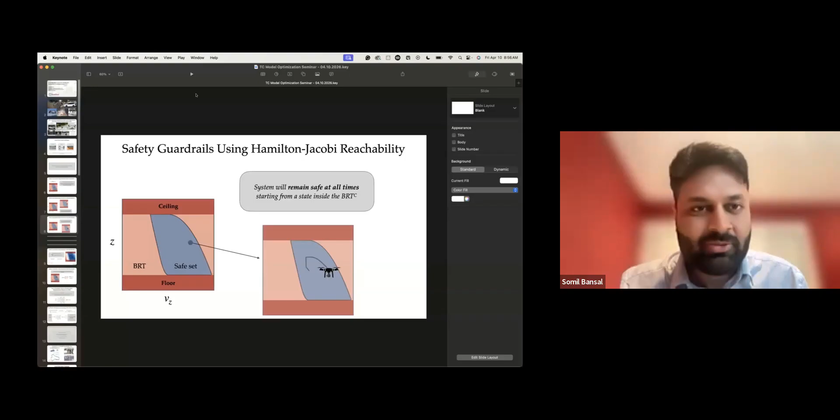Thank you so much for such a warm introduction, Friederike, and thank you for running this amazing series. It's a pleasure to be here. Let me quickly share my screen and then get started. I think I might not be able to share until, oh, well, great. I think I should be able to share now. Can you see my slides and everything? Yeah, perfect. Perfect. Well, thanks again, Friederike.

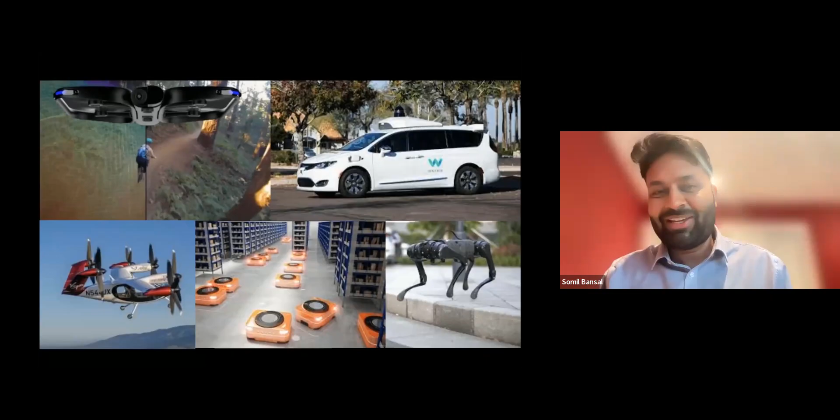And today I'm very excited to talk about some of the work our group has been doing on thinking about safety of robotic systems in open world. And I will explain what I mean by that. So let me start with saying that it is a great time to be working in robotics. Thanks to machine learning and AI, we have made significant advances across a broad range of autonomous systems. So we have started to see the tools that not just work for a single robot, but they work across a variety of different robots, ranging from autonomous cars, autonomous drones, warehouse robots, legged robots, and soon, hopefully, flying taxis.

But at the same time, as these systems are being deployed from our lab environments to complex real-world environments, which is what I'm going to call the open world in this talk, one of the critical challenges they have to face is safety. And this particularly becomes a challenge when we think about these systems deployed at scale. And a perfect example of that in my head is that of Cruise.

So for those of you who don't know, Cruise rolled out their self-driving cars in San Francisco City, I think a couple of years back now, around the time Waymo launched their cars in San Francisco. But they had a number of high-profile safety incidents where the car crashed into pedestrians. And as a result, they had to actually roll back their entire autonomous driving program from the city. So these safety incidents have real consequences when these systems are being deployed in real-world settings.

And so that's what I want to talk about. Like, what can we do about these safety issues? But before that, let's talk a little bit about what makes safety so challenging when these systems are deployed in real-world environments. Now, compared to traditional settings, there are three unique challenges that open world presents. This is by no means an exhaustive list of challenges, but these three sort of come first in my mind.

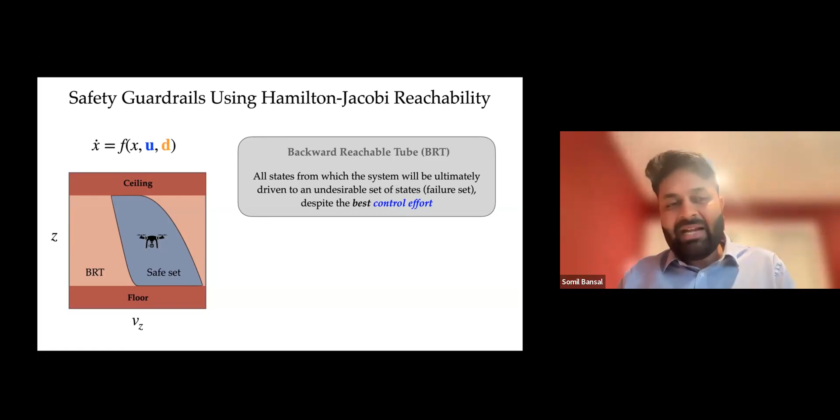To ground this with the help of an example, imagine you are designing an autonomous quadrotor that is moving longitudinally up and down in this room. And so here the ceiling and floor might represent that failure set that we don't want the quadrotor to crash into. This light red region is the backward reachable tube, meaning that if the quadrotor starts at any state inside this set, then it will eventually crash into the ceiling or the floor, no matter what policy you apply on this quadrotor.

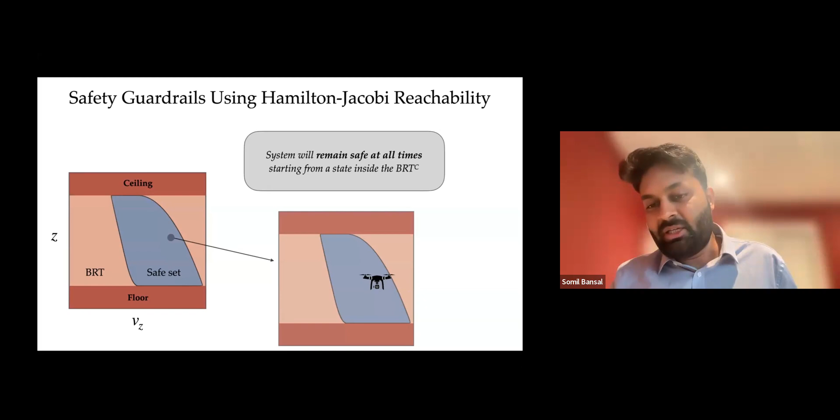What we are really interested in is the complement of this set, or the light blue region over here. And the property of this light blue region is that there exists a policy to keep the system inside this light blue region forever. And so in other words, if we can compute this light blue region, we can keep the system safe at all times.

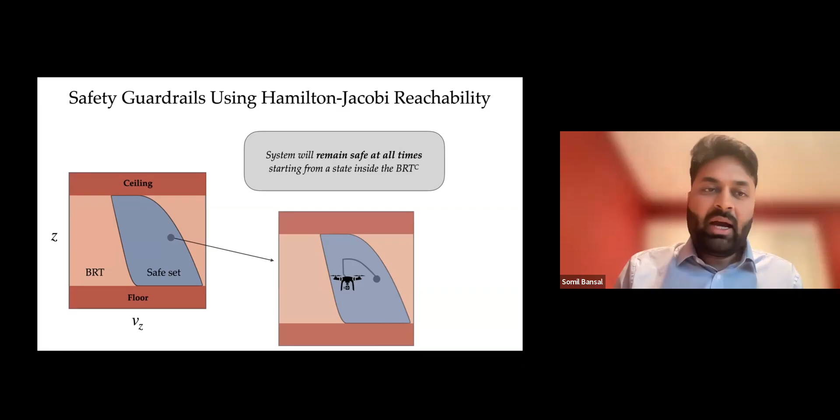Now, one way to compute this backward reachable tube and the light blue region is via solving what we call the Hamilton-Jacobi-Isaacs partial differential equation. Now, this is a scary looking partial differential equation, but ultimately what it gives us is a value function, which you can think of as a safety index function. Essentially, a more positive value function is telling you that you're more safe, and a more negative value function means you're more unsafe.

So for example, here I'm showing the value function for that quadrotor example. The more red means you're more unsafe, the more blue means you're more safe. And the boundary between safe and unsafe is decided by the value function equals 0. So positive value function, more safe; more negative, more unsafe; 0 means you're at the boundary of safety.

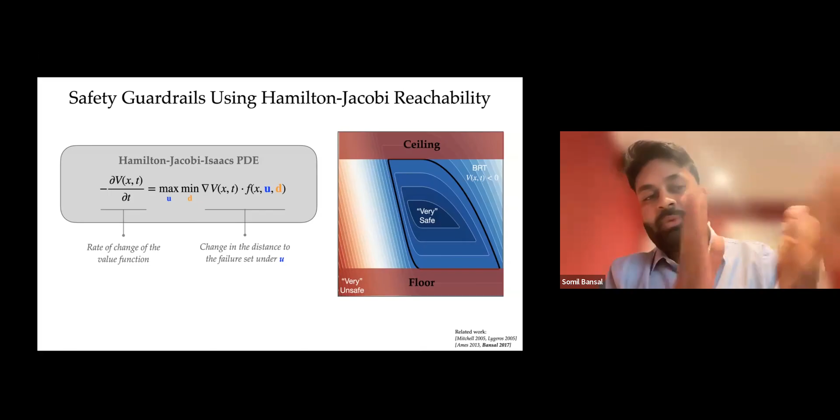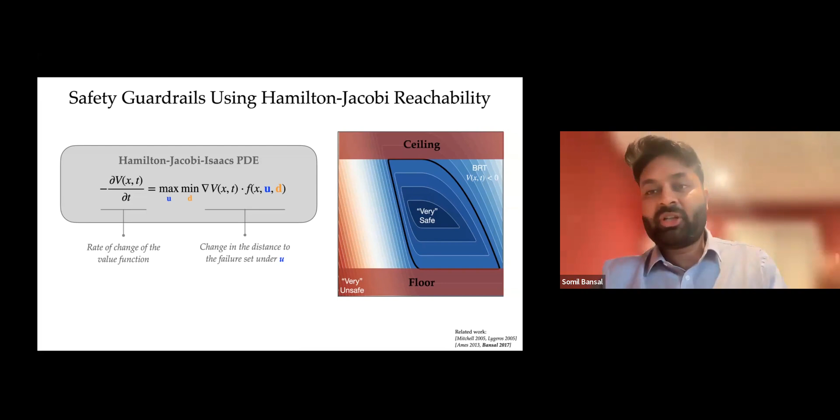Okay, so to summarize the last 4 slides, essentially, if I want to compute a safe set for the system, one way to do that is to compute this value function or the safety index function by solving this partial differential equation. Now, theoretically, this framework is really, really strong. But even if I ignore all the uncertainties that I talked about earlier, computing this value function can be computationally very, very challenging. Traditional methods to solve this partial differential equation cannot scale beyond 5 or 6 dimensional systems.

And so one of the key things that our group has been focusing on is developing neural reachability methods. So these methods are inspired by physics-informed neural networks. Physics-informed neural networks are a set of methods that have been designed to solve complex partial differential equations arising in fluid dynamics. And the basic idea behind these methods is that you can use the partial differential equation as a loss function for training the neural network to learn an approximation of the solution.

And so what I mean by that is we know that the true safety value function must satisfy this partial differential equation. So what if I use the PDE violation error as my loss function? And essentially what I do is design a very simple self-supervised learning algorithm where in each training iteration, I randomly sample some state and time. I pass it through the neural network to compute this value function. Of course, it's only an approximation. But then I look at how much PDE error there is in my solution. And this error can then be backpropagated to update the neural network parameters.

And so essentially you can imagine the neural network is incentivized to learn a more and more accurate representation of the safety value function that satisfies this partial differential equation over its training iterations. And if I'm able to reduce that error to 0, then I found a perfect solution. In practice, we find an approximation to this partial differential equation.

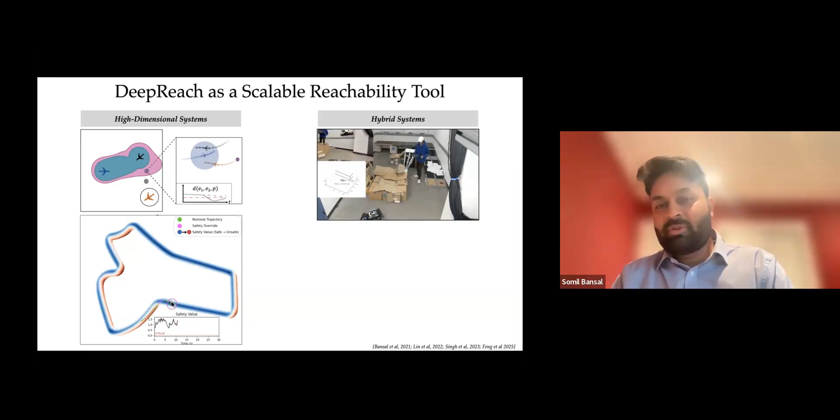the moment. We have also applied these methods to compute reachable sets for hybrid systems and contact-rich systems such as legged robots, as well as to compute reachable sets directly from simulation-only information. So when we can't write the dynamics in analytical form, but can only write a simulator. And so you can imagine this being very relevant for sim-to-real kind of training pipelines.

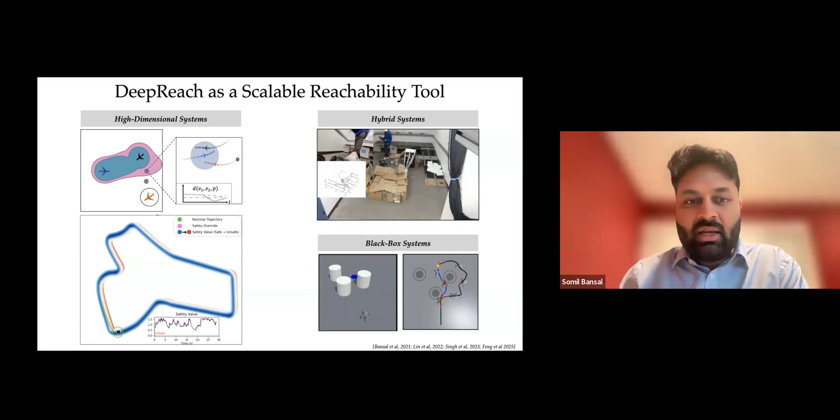Now, before I move ahead and talk about how to handle open world uncertainty, I want to make one last comment, which is the reason why I'm so interested in this value function is that this value function provides a very simple guardrail mechanism on top of any nominal policy. And this nominal policy could be an AI-based policy, could be a foundation model-based policy, where the idea is that as long as my nominal policy is keeping me inside the blue set, in other words, if the value function is positive, I can apply that nominal policy uninterrupted.

Now, at any moment, if that nominal policy is trying to get out of this blue set, meaning it tried to enter the BRT, that's the only time I apply the safety controller that comes out of Hamilton-Jacobi reachability analysis. So in this manner, we can actually put a guardrail around the nominal policy where we do minimal intervention in the nominal policy to maintain system safety.

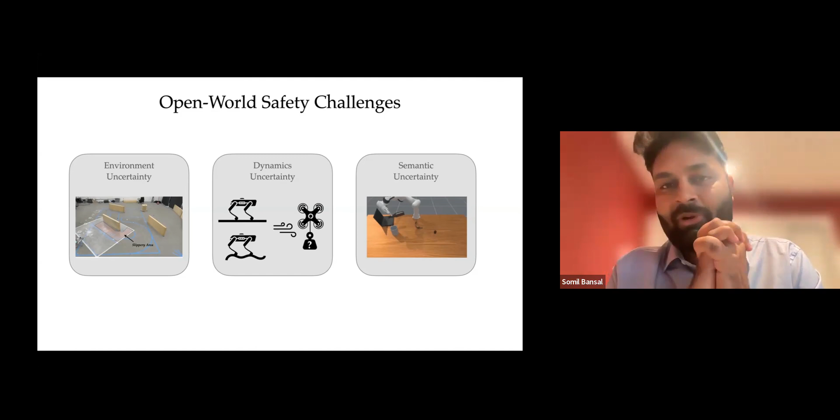Okay, so what I've talked about so far is that reachability analysis is one way to provide guardrails on systems. We now have tools to compute these reachable sets and the value functions for high dimensional systems. But so far, I'm still assuming that what is safe about the system and what is unsafe about the system is known a priori. Dynamics are known a priori. Essentially, nothing is changing online yet.

And so now I have to really tackle the open world challenges where I have environment uncertainty, dynamics uncertainty, and semantic uncertainty that's only going to be revealed to me during deployment time online. And so that's where the flexible nature of these neural reachability methods comes into the picture, where we can now input additional data, for example, the raw observations of the robot, and learn the value function as a function of these observations. So essentially, we are calling these observation-conditioned safety representations, which can be queried online to adapt safety corresponding to any online data you might receive on the robot.

And here is an example of what that means. So here this quadruped has never been in this environment before. What it has is an onboard LiDAR from which it's getting LiDAR scans, something like this. And it is using these observation-conditioned reachable sets to constantly adapt its safety value function in response to these LiDAR scans, essentially in response to the obstacles it's going to encounter in the real world. And then it's using that as a safety guardrail on top of an RL-based policy. It's a machine learning-based RL policy, to provide safety guardrails on top of that.

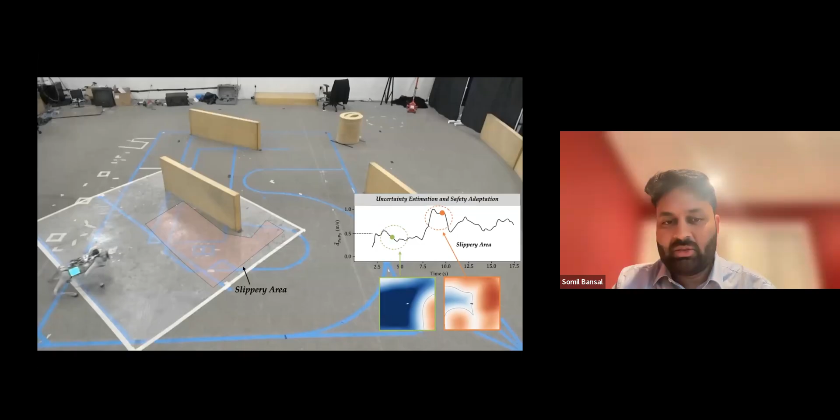To show you the kind of things it can do, in particular here I'm trying to target the adaptation to dynamics uncertainty. This robot is going through this environment where it needs to go to a goal location somewhere over here. Again, the robot has never been in this environment before. And what we have done is we have put a lot of baby oil on this slippery area, where I marked the slippery area that the robot has no idea about.

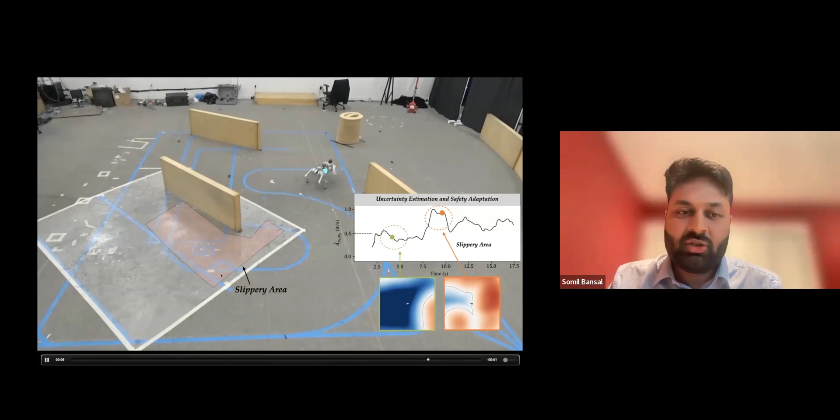But what it is doing is it's constantly estimating the uncertainty in its own physics. And you can see as the robot is going through this slippery area, the uncertainty increases significantly, our estimation increases. And as a result, my safe set, my value function becomes much more conservative. And it is using the safety value function to then make a decision to use the slippery area to slide along this area and avoid the obstacle in front of it.

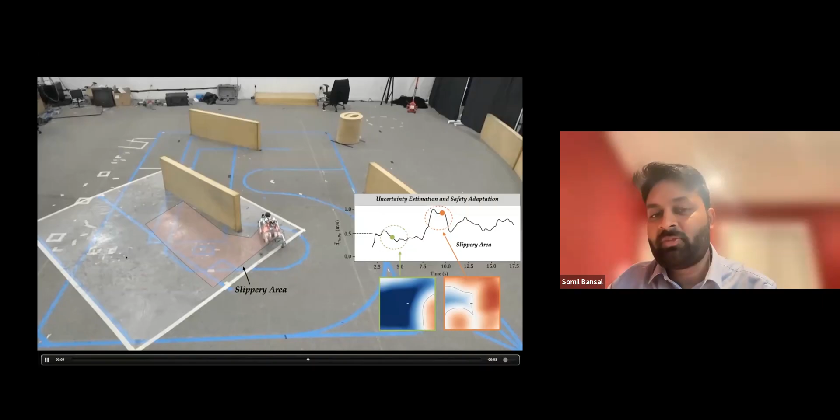And once it crosses that slippery area, it continues along its path uninterrupted because the uncertainty again reduces. So this is the kind of adaptation we can bring to the robots if we can compute these safe sets really quickly online.

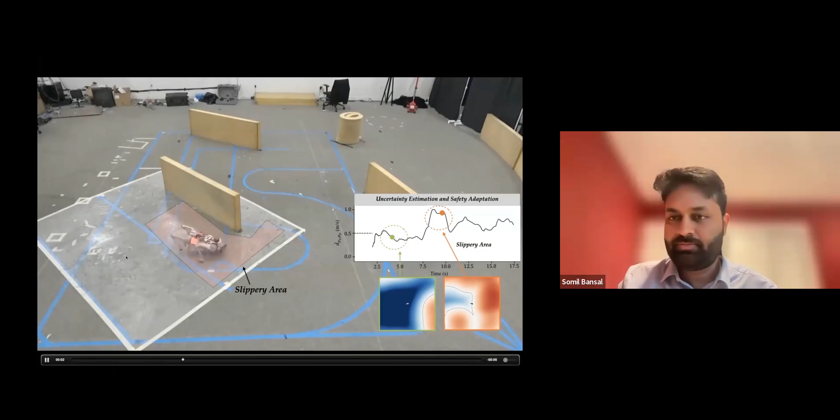Okay, so far I have talked about, I would say, physical safety, essentially collision avoidance. But the other aspect of the open world that's very interesting is semantic safety. So as I mentioned earlier, maybe there's a coffee spill in front of your robot, and you don't want the robot to go over that coffee spill. So it's not necessarily an obstacle over here.

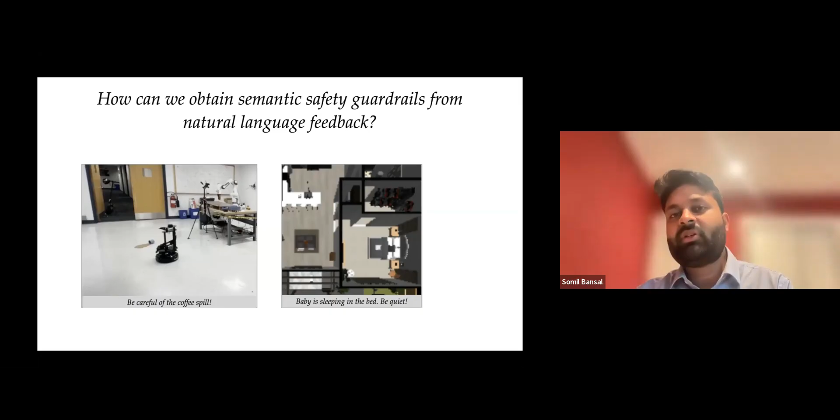So a key question becomes, how can we first of all encode such safety constraints, and how can the robot respect those safety constraints? And in our lab, we have been thinking that natural language provides a very flexible mechanism to specify such semantic safety constraints. For example, it's very easy to tell the robot, hey, be careful of the coffee spill. Now the question becomes, we can communicate these safety constraints through natural language feedback, but can the robot understand these natural language safety constraints and can it respect them? And so that's what I'm going to talk a little bit about.

In particular, we have been leveraging state-of-the-art vision language models to convert these natural language-based safety specifications into structured safety specifications, something that can be understood and consumed by downstream safety pipelines, such as control barrier functions or reachability analysis. For instance, here, if I give the natural language feedback that the baby is sleeping in the bed, be quiet around there, these vision language models are able to take this natural language, parse it, and come up with a template safety constraint. So in this case, it tells the robot to slow down near the baby bed.

And then once we convert these language specifications into structured specifications, we can use perception pipelines to, for example, segment the relevant objects. So essentially, we are now converting these safety constraints into physical constraints. And once we have the physical constraints, then we can actually use more traditional safety analysis methods to enforce such safety constraints.

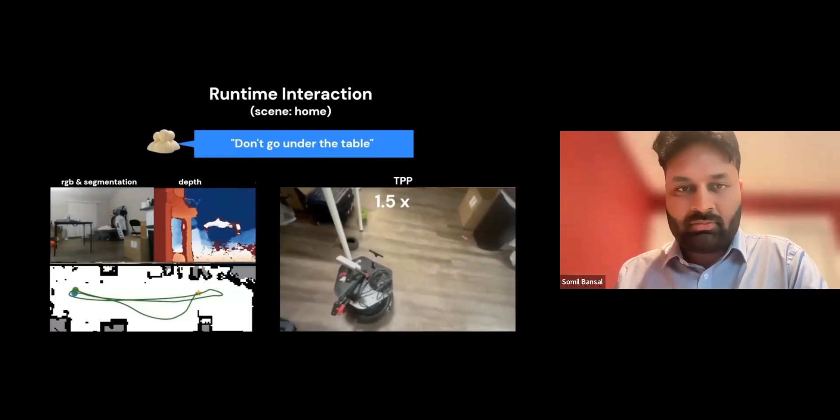So it almost feels like sometimes that you have to come up with and learn the right language to speak with this vision language model to make sure they work reliably. And so in another line of work, which unfortunately I won't have the time to present today, we have been trying to stress test these vision language models and identify what kind of language prompts they work well with and what kind of language prompts they don't work well with, and use that data to improve the safety or robustness of these vision language models.

Okay, now in the remaining time, I want to shift gear a little bit. So far, I have talked about how robots can use neural safety representations to learn safety value functions directly from vision and natural language feedback, and use them to adapt to environment and dynamics uncertainty online. But we've been also thinking about, can we use these methods to provide guardrails on foundation models, such as large language models and diffusion models?